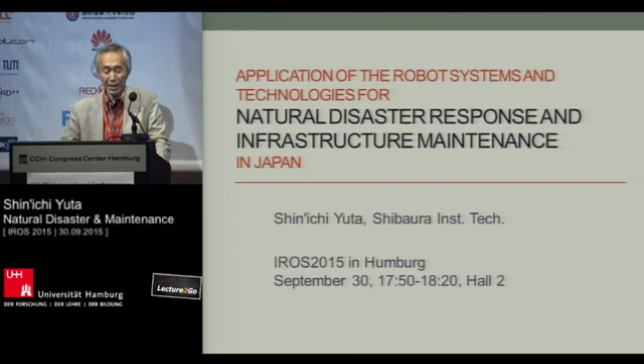Today I'd like to talk not about research itself, but rather the utilization of robot systems in society. Especially I'll introduce Japanese activities of disaster response and infrastructure maintenance where robot systems are used. First I will talk about the so-called unmanned construction system, and I'd like to introduce Japan's recent activity of maintenance and disaster response for infrastructures.

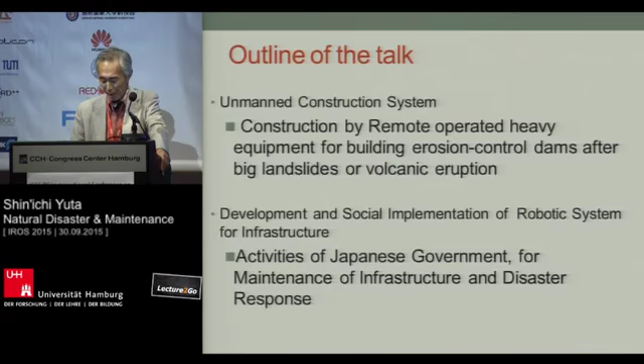I believe the important role of robot technology for society is to provide a solution for existing problems in society. Recently in industry, solution business is very active, and robotics is one of the key technologies relating to control mechanisms, hardware and software to give solutions for problems.

In this context, research and development for providing solutions, and how to provide that solution, might be a main theme of robotics.

Especially in Japan, recent needs for robot technology for infrastructures: first is disaster response capability. This photograph is actually a water flood two weeks ago near my house, and this was the first occurrence of such big rain in 20 years.

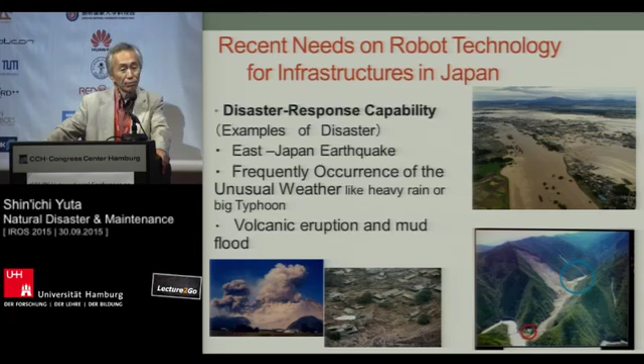Another need for infrastructure is the aging problem, not of humans but of infrastructure itself. Recently several bridges have become very difficult to continue using in Japan. A few years ago we had a very big accident where the ceiling of a tunnel dropped down and hit cars.

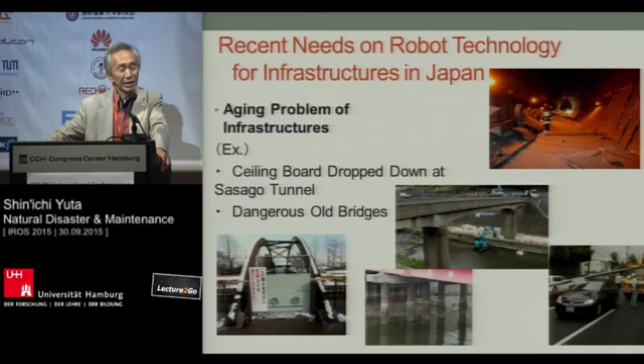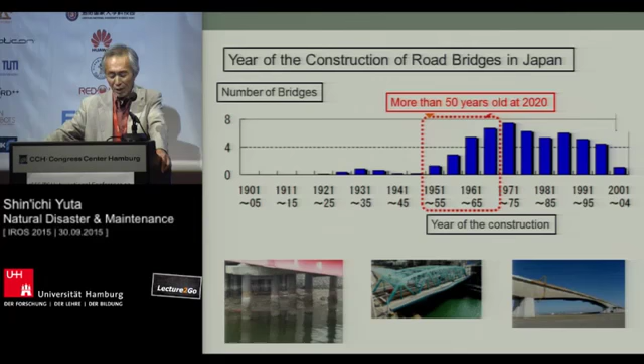This is a graph of Japan showing the years of construction of road bridges. We can see that in the later half of the 20th century many bridges were constructed, and they are now aging. Maybe by 2020, almost half of the major Japanese bridges will be older than 50 years.

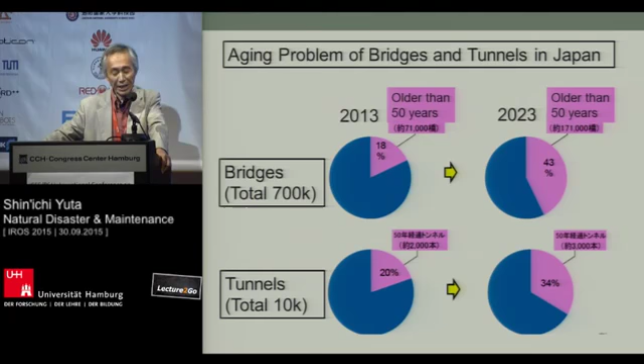The 50-year age of construction is one point where we need serious maintenance. Tunnels also have similar aging problems.

I believe the important keyword in society now is the continuous keeping of our current comfortable life. For this purpose, maintenance of infrastructures is very important, and if the infrastructure maintenance chain is cut, it becomes a crisis to our daily life.

The biggest problem is not so much technically hard, but reducing cost is the most important factor, because Japan's population is reducing and the economy cannot grow so fast. Also, for disaster cases, avoiding a second disaster and knowing the situation to start restoration quickly is very important.

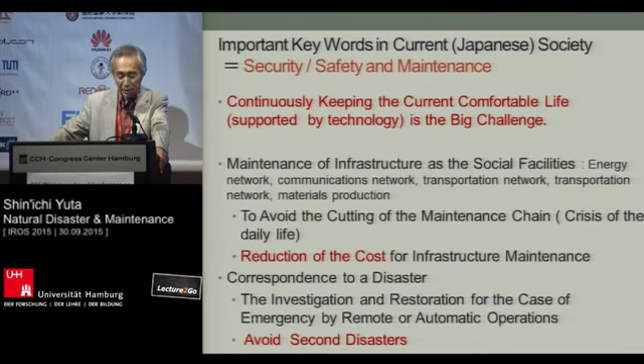For this purpose, I believe robot technology is very useful for society. More concretely and practically, two types of technology in robotics are very useful for this purpose. The first is access technology, the mobility of the machine.

This mobility should include not only ground but also air, water, underwater, or wall climbing, and similar capabilities.

Another very useful technology we have is automatic operation or remote operation work, which might include many types of tasks. As well, robot technology can provide a very important point in building a total system, design and implementation for real use.

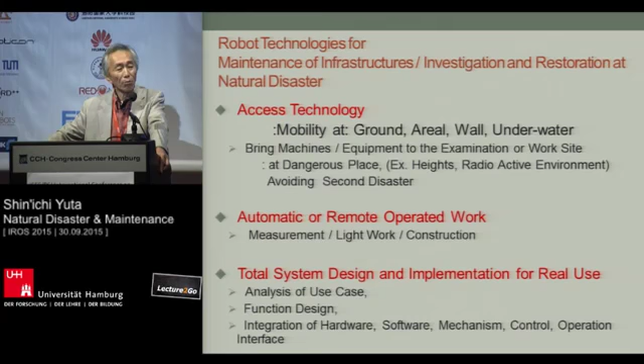This is also a strong point of the robotics community.

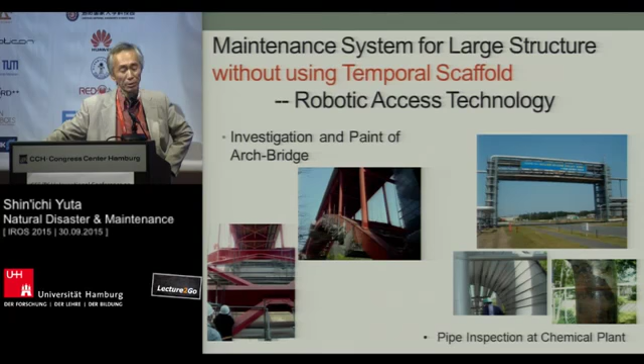Robotic access technology provides the possibility of a maintenance system for large structures without temporary scaffolding, which might reduce costs significantly. We in the robotics community are developing many methods of access technologies.

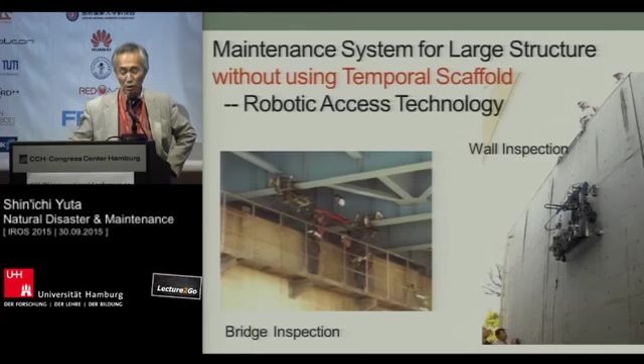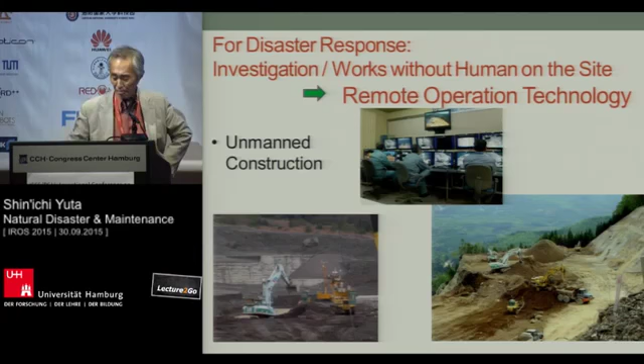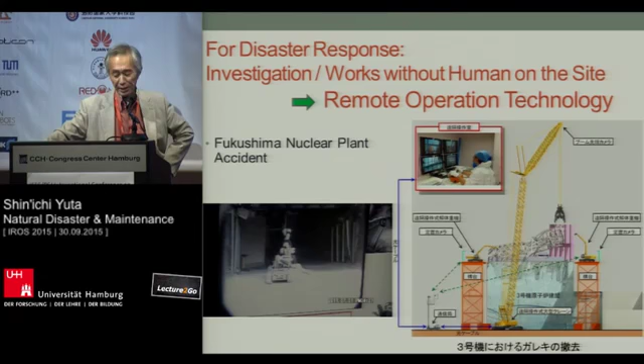As a remote operation for disaster response, we have in Japan a remote-controlled construction methodology named Unmanned Construction, which I will talk about later. Remote operation was also very much used and effective in the case of the Fukushima nuclear plant accident, and it is still working in this field.

First, I'd like to introduce the unmanned construction system. This is a really working robotic system for disaster response in Japan. It is teleoperated heavy machinery for construction, and teleoperation is used to reduce the risk of a second disaster or to work in a dangerous area.

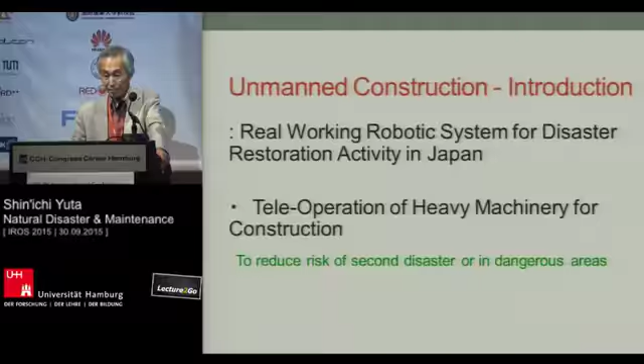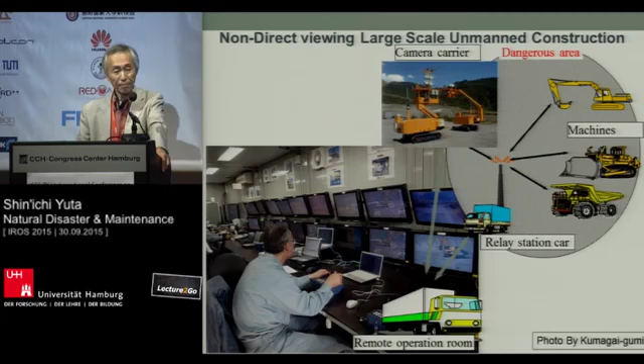So this is a concept figure of the remote, unmanned construction. The people are located in a room in a safe area, and communication is connected to the construction machine, heavy machines, to realize the construction works.

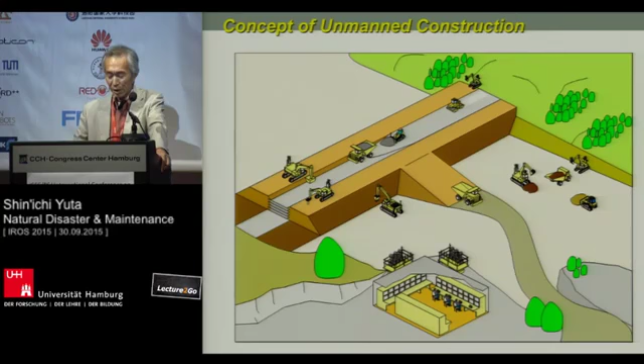And this is also the concept figure. The construction machine works where people cannot be, or it's better to avoid coming into this area because of the risk of a second accident.

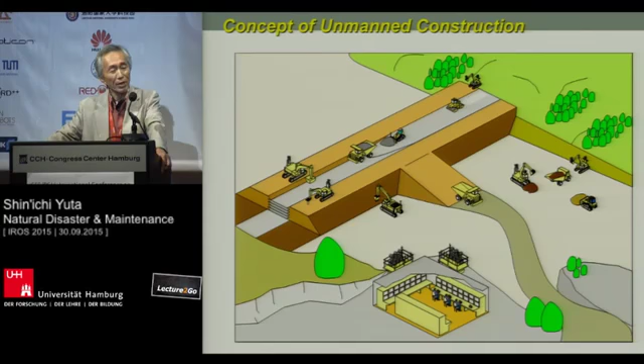So in this concept, in Japan, several works are already going on. Usually the machine operator uses images from several cameras on the construction site, and a skilled operator, skilled both in heavy construction machine control operation and remote operation, works to control it.

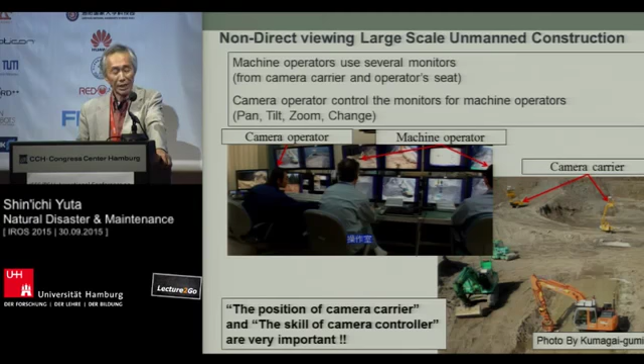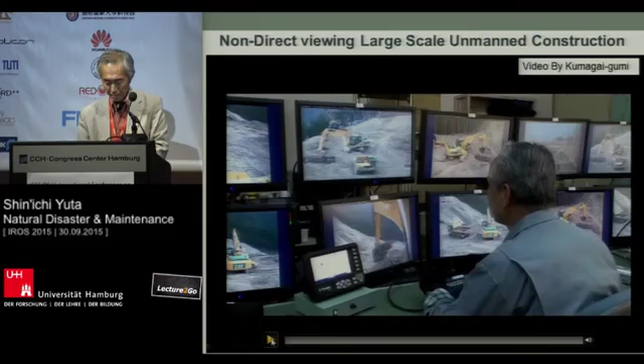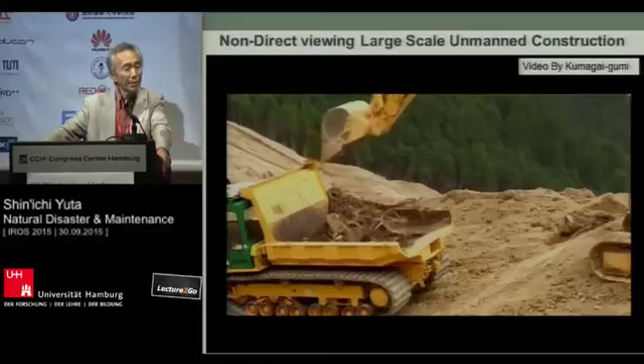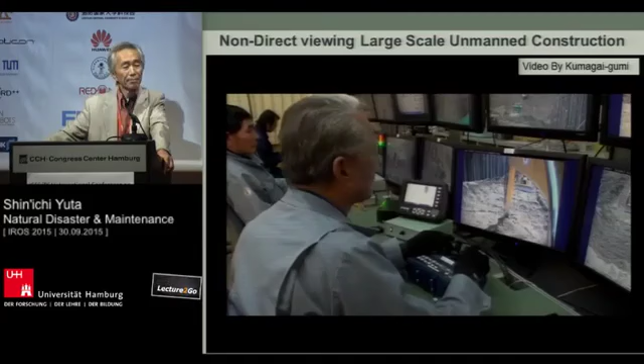This image is after the big landslide in Kii Peninsula heavy rain. It was a very big landslide with big damage. Under the slide, there are several houses that were crushed, and still a large amount of soil and rocks remained at the top of the slide.

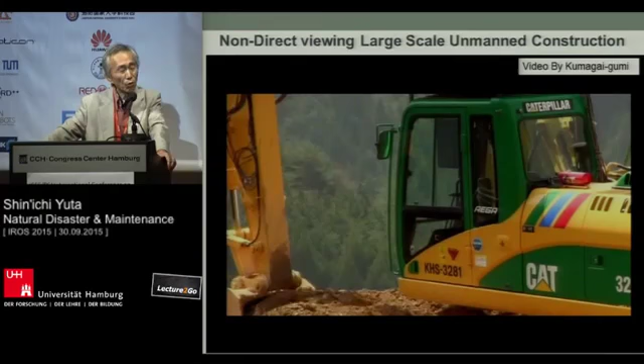So the Ministry of Construction decided to remove the soil and other materials from the top of the landslide to avoid a second big slide.

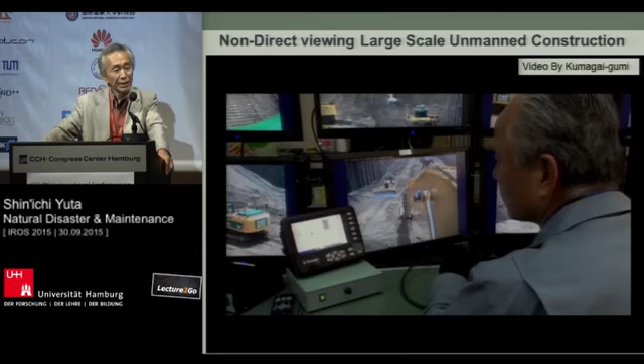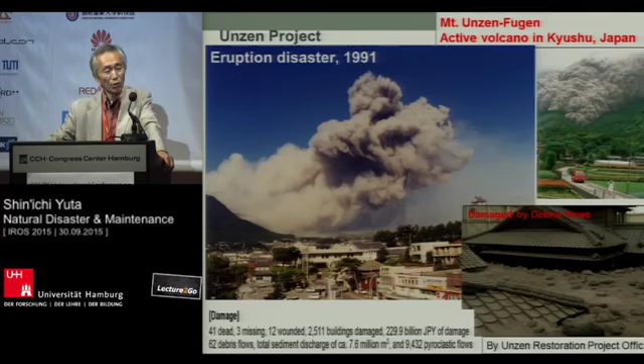This unmanned construction started at Unzen Fugendake active volcano in the 90s. We had a very big eruption, and heated debris flow made very big damage. After that, mud flooding by rain occurred, and many houses were covered by ash or debris rocks.

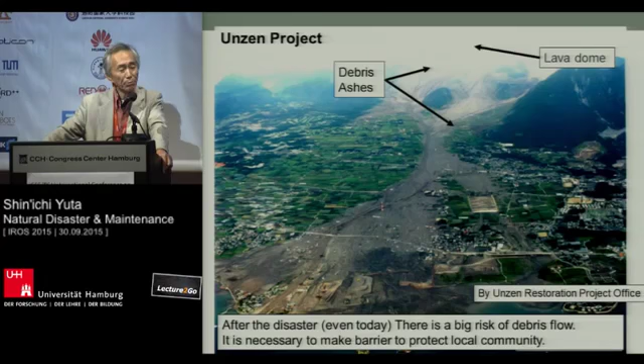So then we wished to remove the ashes and rocks, and also planned to construct a dam as a debris barrier. But it was still a very difficult, dangerous area, so we had to realize the construction work without humans on site.

This was the Unzen project. It started in 1994, and actually finished this March.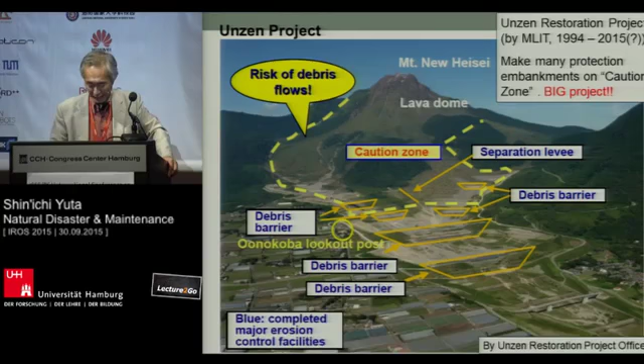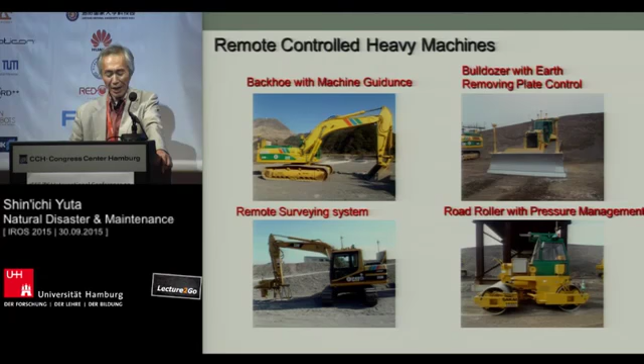What kind of machine is used is like this: backhoe, bulldozer, or road roller, or many machines, dump truck to bring the rocks and also to supply the concrete, and crawler dump as a water sprinkler, or many other machines.

As well, the communication repeater is necessary, and the remote controlled crawler dump is used for communication repeater, and also a camera car is used, and a long arm backhoe was used for the camera.

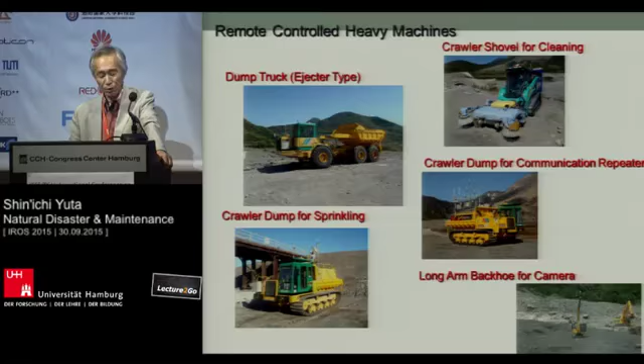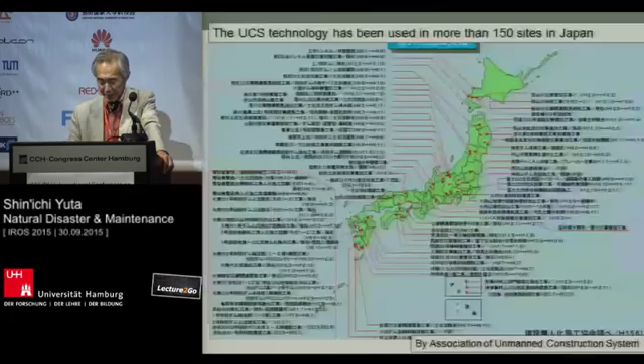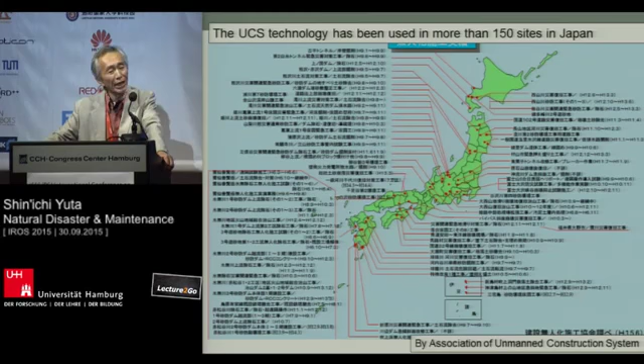So this is our experience. After Unzen, in Japan, we have applied this technology at 150 sites. Each is not so big, but some of them take 2 years, 3 years of construction. Actually, this unmanned construction system is really a practical system for real works and real sites.

Technology progressed much and improved while we were using this method in real sites. Further, a total system was established which can be provided in case of emergency. So actually in the case of the Fukushima accident, we had a total system capable of being brought to Fukushima.

One reason why we could do such methodology is that we often have occurrences of abnormal weather or natural disaster in Japan. It's abnormal, but not so special.

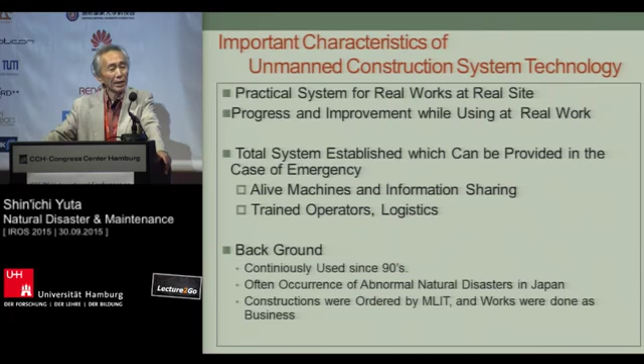This construction was ordered by MLIT, the Ministry of Land, Infrastructure and Transportation, Japanese government, and works were done as a business by construction companies. So this is actually a business application, really used for Japanese society.

Next, I'd like to add something about the recent 2 years of activity between METI and MLIT. METI is the Ministry of Economy, Trade and Industry, and MLIT is the Ministry of Land, Infrastructure and Transportation.

This development and utilization of robot technology for infrastructures is the purpose of this collaboration, but it's focused much on utilization, not on development or research.

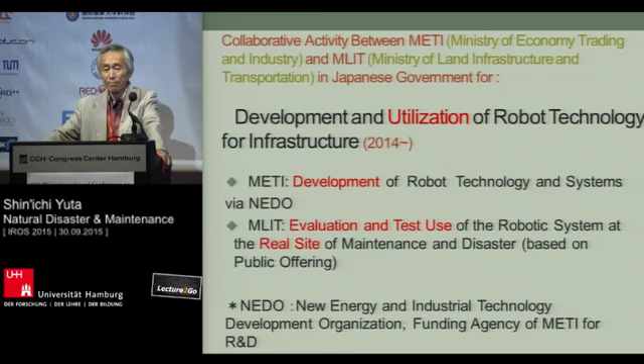As Professor Takanishi told yesterday at our opening ceremony, in Japan, Prime Minister Abe started the so-called robot initiative. This robot initiative considers much how to utilize robot technology for society, not so much on development or research. Actually, it's not so happy for us researchers, but anyway, the focus is on utilization.

But for utilization, we need a certain amount of development, though more focused on how to utilize. For this purpose, MLIT had a project for evaluation and test use, and plans to use it in more real use.

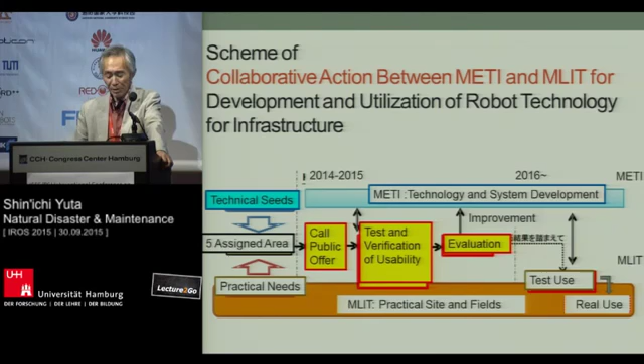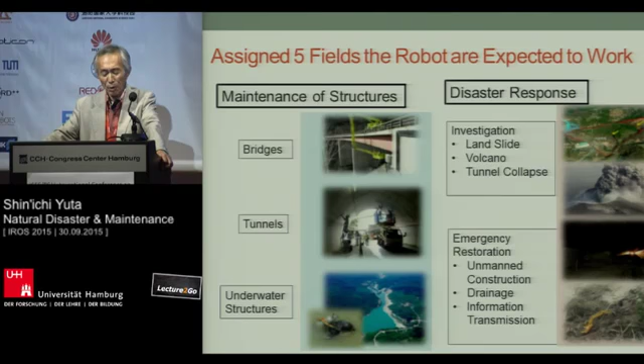The 2 ministries agreed on the scheme and decided and assigned 5 fields where robots are expected to work. First one is maintenance of structures like bridges, tunnels, and underwater structures. Second is disaster response, especially investigation and restoration.

Based on this scheme, NEDO, which is a funding agency of the Ministry of Economy, Trade and Industry, started a project for development of systems to solve the social problem of infrastructure maintenance.

And it includes not only the robotic system, but also sensing technology or imaging technologies. Actually, I myself am appointed to be the project leader to manage this project.

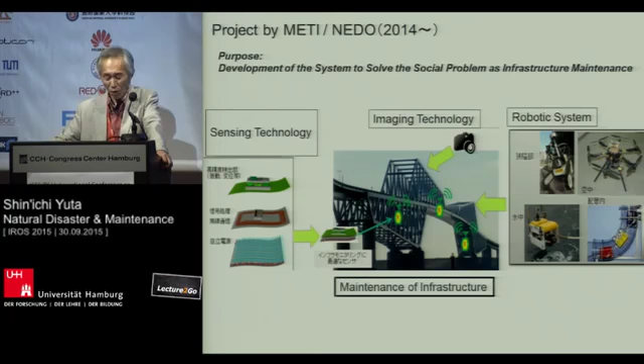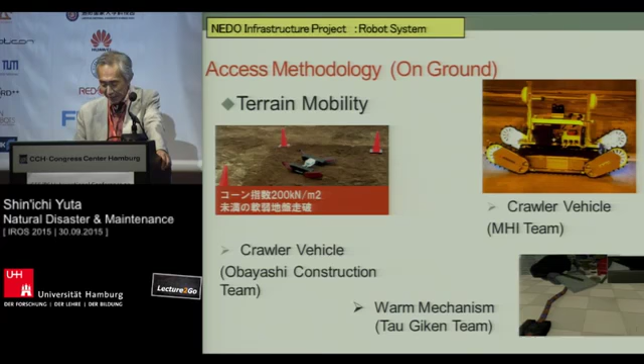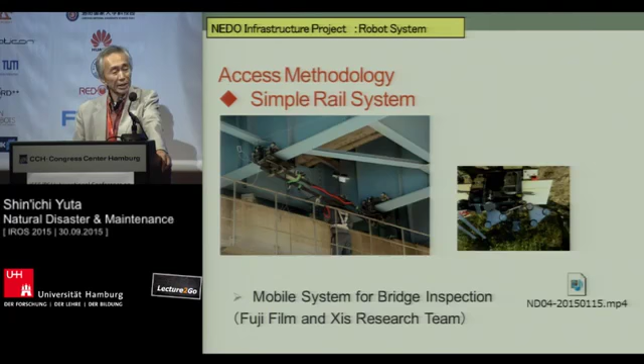For the robot system, several access technologies are really under development, but each development is seriously considering the real problem or real site, real needs. Terrain mobility, wall-scaling mobility, special methodology using rail to test the bridges, or underwater testing equipment, and also other access methodology, UAVs, are very much used.

Based on this scheme, the Ministry of Land, Infrastructure, Transportation called for a public offer for robot technology to be used. This is not support for development, just calling for possible technology.

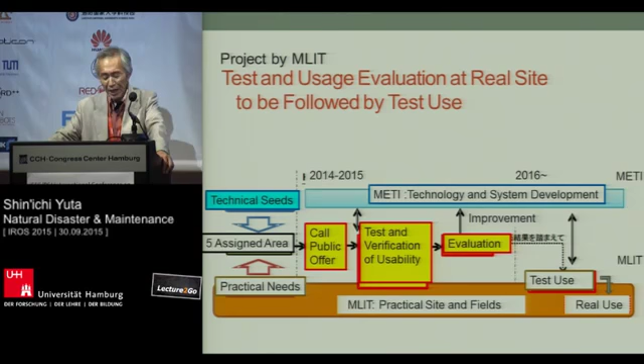This ministry tests and verifies usability and evaluation, and finds the possible robot systems for test use. After test use, they are planning to use them for more real purposes. Last year, many robotic systems were applied from many companies, organizations, or universities.

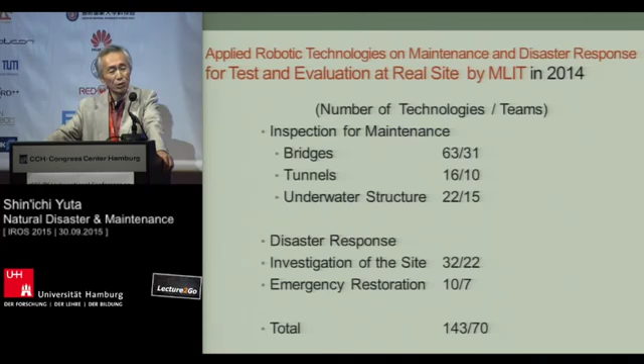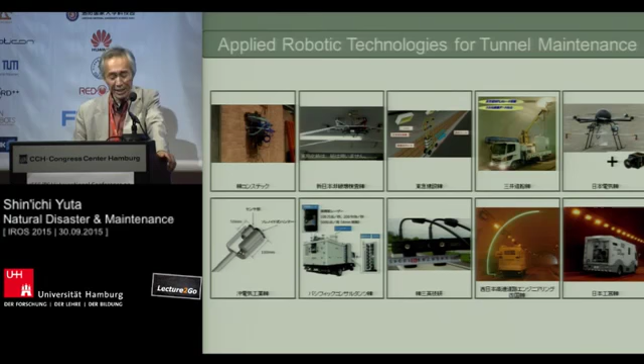The total number in Japan was 143, for bridges, tunnels - many kinds of robotic or automatic technology were used, including vision systems, but not element technology, rather just technology that can be applied to this problem as a system. It's applied to underwater maintenance and disaster investigation and restoration.

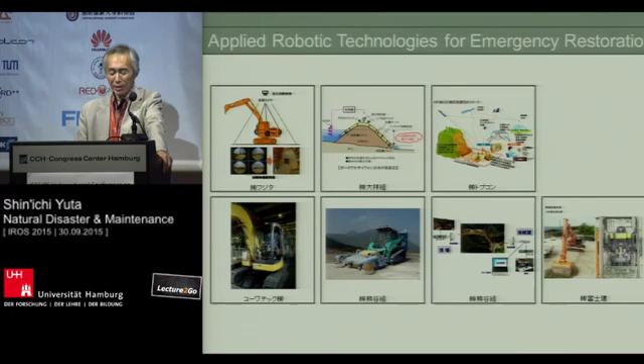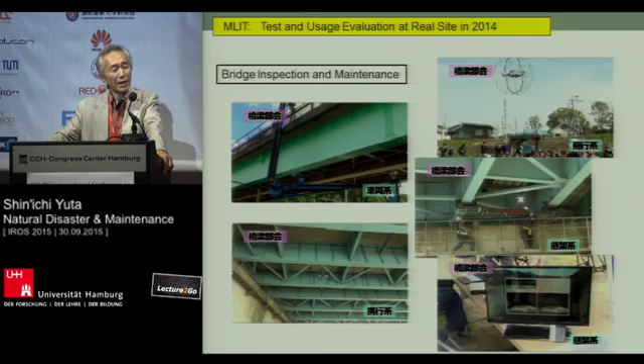And these are images of the evaluation test at the real site, using real bridges. This year, we are planning to use more realistic bridges, which are older and have many problems, as well as tunnels and underwater sites. So maybe each machine took 1 or 2 days to be tested.

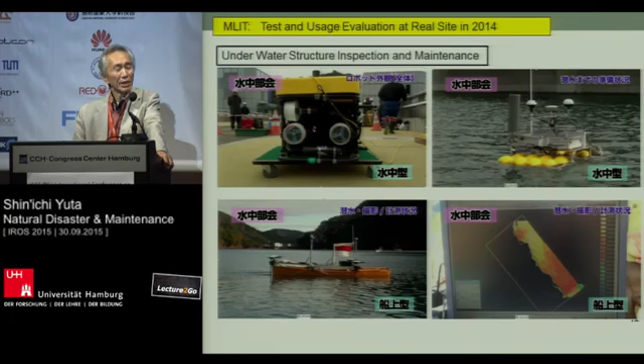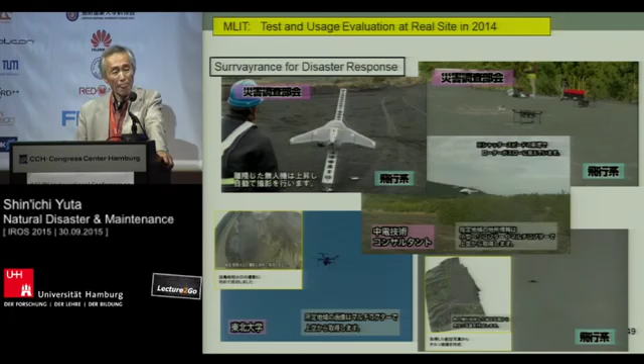A committee based in the Ministry of Land seriously checks the function and whether it is useful or possible to utilize. Some of the technologies are already well known, and some are not known technology, but it's very difficult to keep it secret because we test it in the open area. So many technologies were observed by many people.

Okay, this is just an introduction of Japanese activity for infrastructure maintenance and infrastructure disaster response. And one point of this unmanned construction system is, anyway, it is utilized first, rather.

When we started, we had construction machines and communication, cameras, monitors, everything. So then we started to just connect and use them. But after that, we learned of many problems in making the work more effective or wider in range. So then the technology advanced very much by using this methodology for a real purpose.

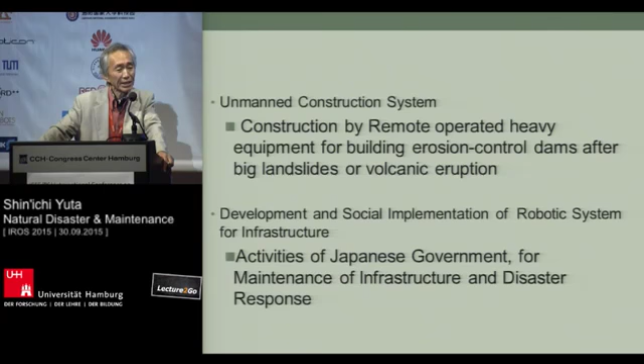As well, the activity of infrastructure maintenance and disaster response is also important for the utilization and social implementation of the robotic system. And this is rather a big challenge for us, to use robot technology in society. Thank you very much.

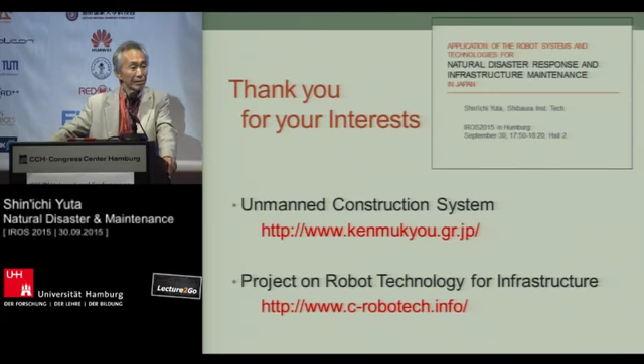Yeah, but I mean, we saw Usama's presentation yesterday. Maybe that can also be helpful here. Okay, since we are already running late, I thank you very much again.